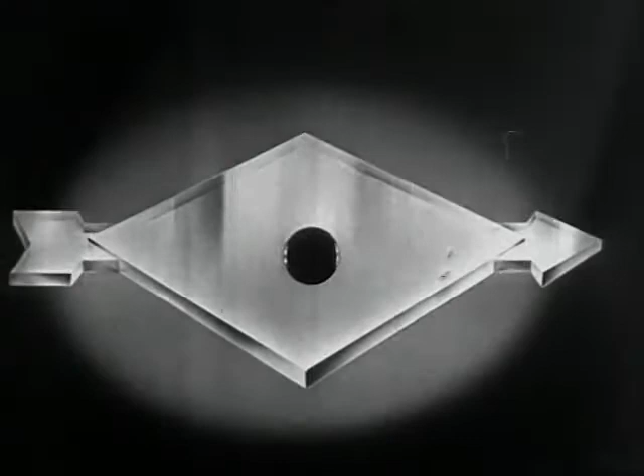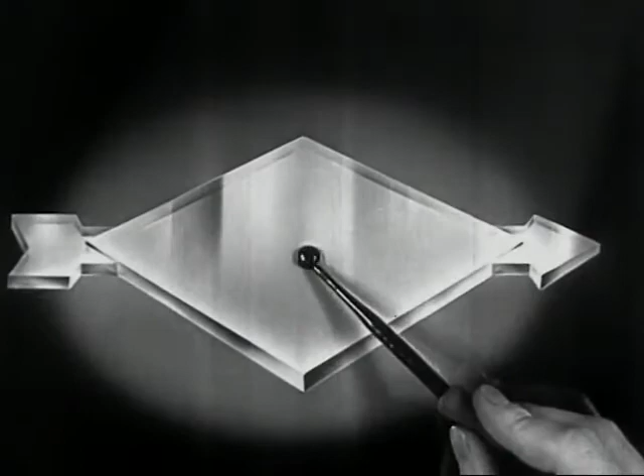The flash of power, the gleam of oil. In the sky, the power of oil conquering the heights. On the sea, the might of petroleum pulsing in great engines of the liners that traverse the deep. On land, oil feeds the fiery furnace or drives the diesel engines along far-flung rails of steel. And on the open road, well, you know what makes your auto run.

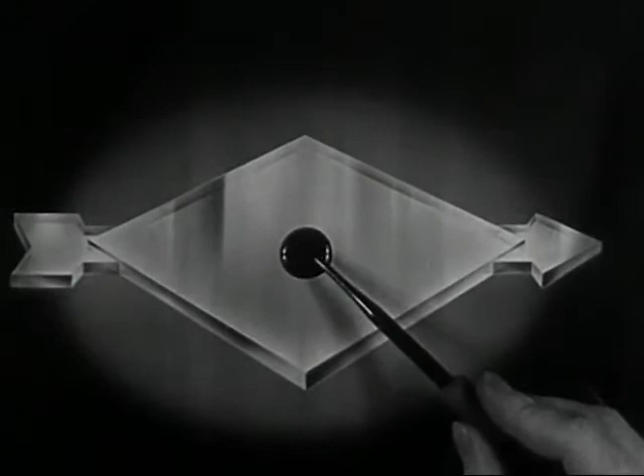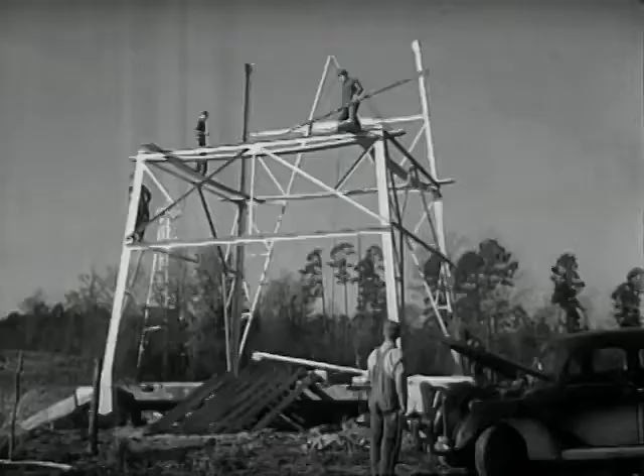For millions of years, this source of power slept peacefully in the dark recesses of the earth until modern magic loosed the liquid energy from its subterranean prison. Great areas became forests of towering derricks. And here's how the petroleum forest grows.

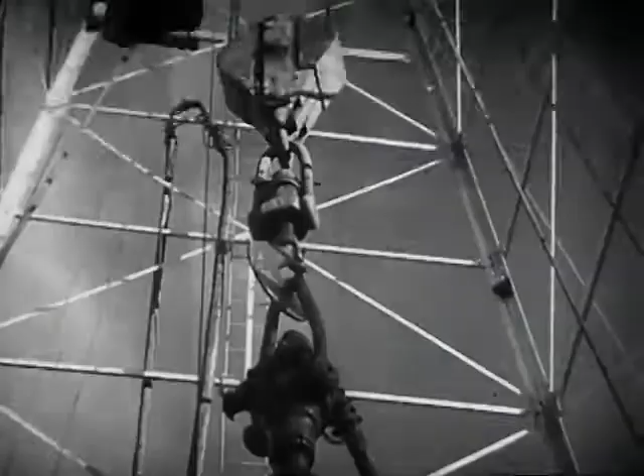A cellar is dug, and a rotary table to turn the drilling stem and the bit is set in place. Round and round the rotary goes, drilling deep down to oil. A steam engine drives the drilling mechanism. They're inserting a length of pipe, lengthening out the stem for deeper drilling. A new joint is waiting.

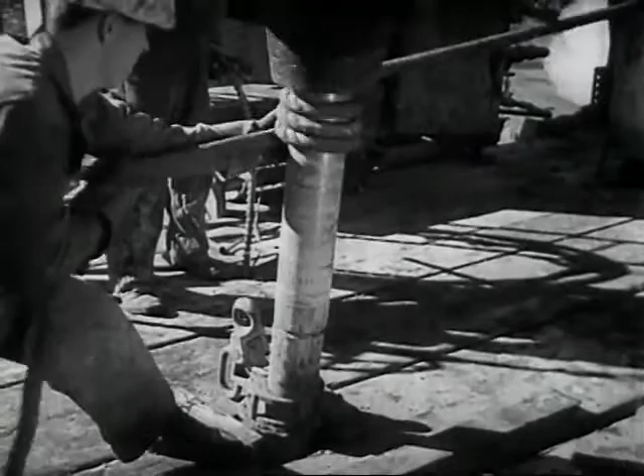Oil field workers are called drillers, roughnecks, roustabouts, rope chokers. The oil field treats our ears to odd and colorful names. Now the drilling stem has been lengthened, then round and round once more.

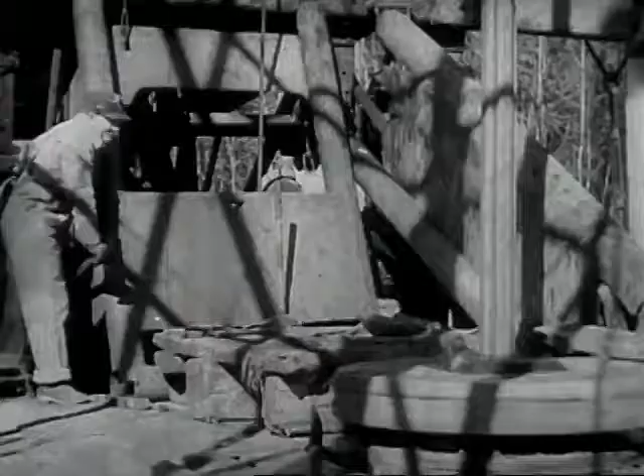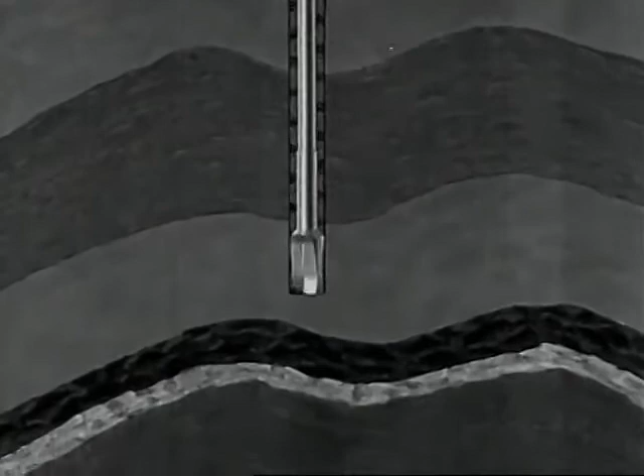Down through layers of sandstone, shale, limestone, down to astonishing depths. This well 5,000 feet. Some 10,000, 2 miles into the earth. And then, after weeks of drilling, fighting against natural obstacles, the drill at last reaches the oil sand, porous rock, which holds the oil much as a sponge holds water.

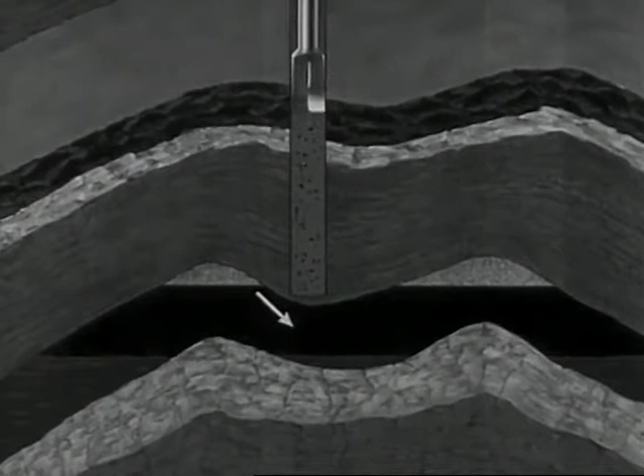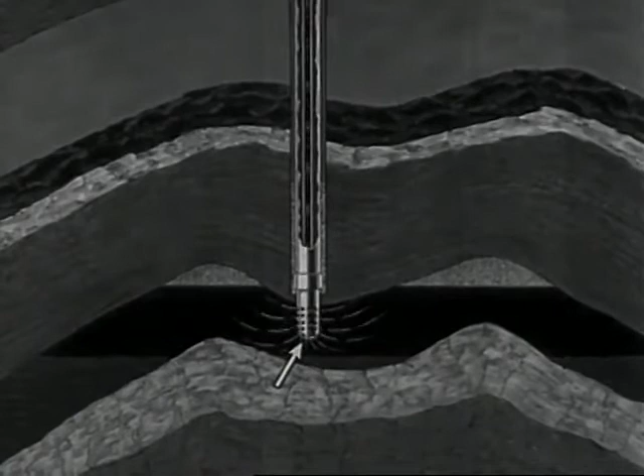Next, the casing is lowered to the bottom of the hole and cemented in position. Then drilled through the oil sand, and a screen is installed at the base of the casing. The screen extends down into the oil sand. The oil flows through the screen, up through the small pipe tubing to the surface.

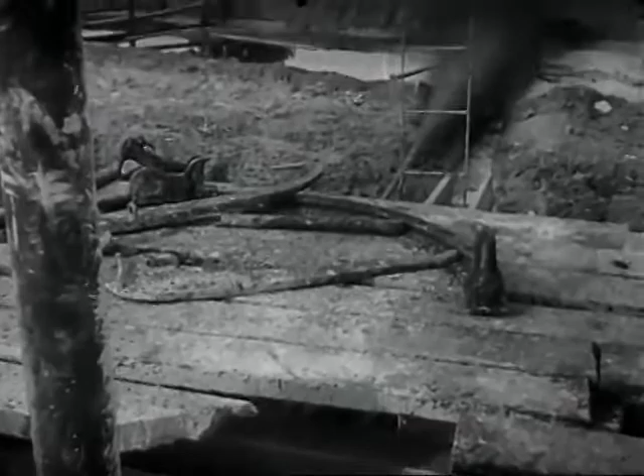So they've struck oil, and now the well must be cleaned of the mixture of drill mud and oil. Some wells flow of their own pressure. Others must be pumped, need power.

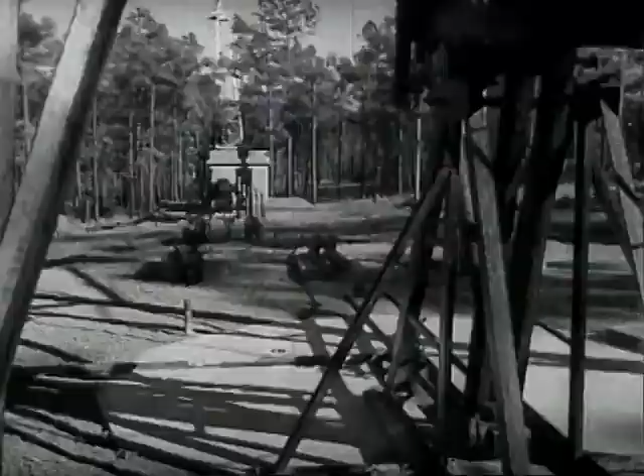The power is transmitted to groups of wells, the ever-swaying rocker arm, the rhythm of pumping, the unceasing heartbeat of the oil fields. A 24-well hookup is the height of oil field power, pumping black magic from 24 drillings in the earth, all at the same time.

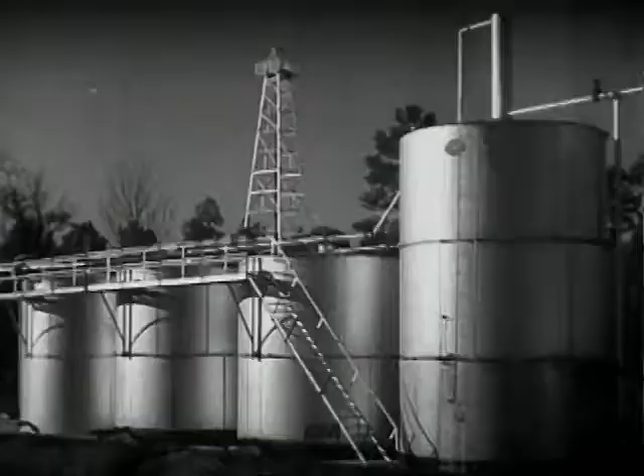Out of the ground, the oil is cleaned of natural gas or water, which is combined with it. Next, the petroleum starts on its way through a great network of pipelines. There are powerful pumping stations every 40 or 50 miles to keep it moving along the lines. The lines of pipe, alive with racing oil, run through forests and over plains to these silver discs.

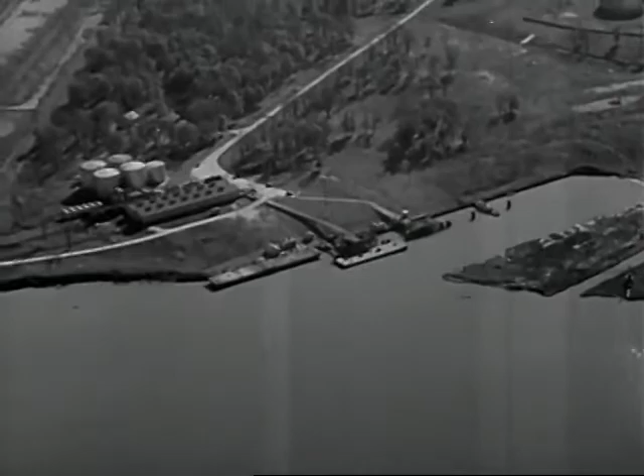They're storage tanks where the oil rests briefly before it rides the waves in giant tankers. And they're masterpieces of shipbuilding, those tankers of steel. The largest navigate the sea at 15 knots and carry 5.5 million gallons of oil. The voyage of oil to the refineries.

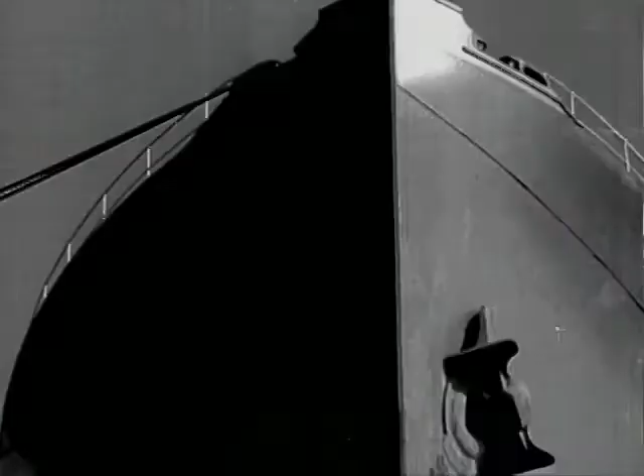The refinery with its modern structures, technological towers, minarets of science, docks, office buildings, pageant of industry. Day after day, there is an endless flow of oil as the tankers discharge their liquid cargo.

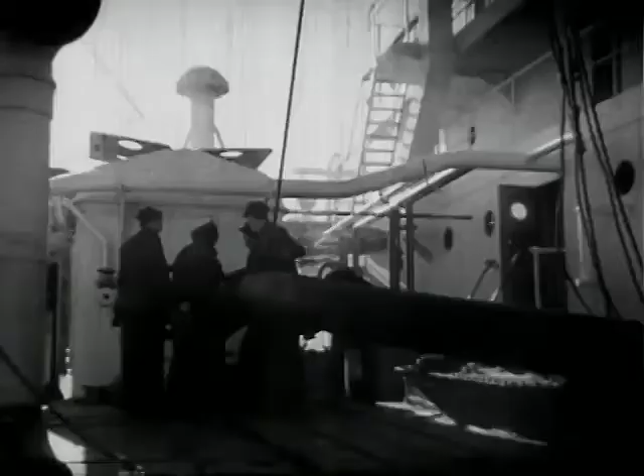Unloading oil is a vast operation of piping through huge hoses. Discharge pipes on the vessel and receiving lines on the dock are connected, and a cargo of 5 million gallons is discharged in less than 24 hours.

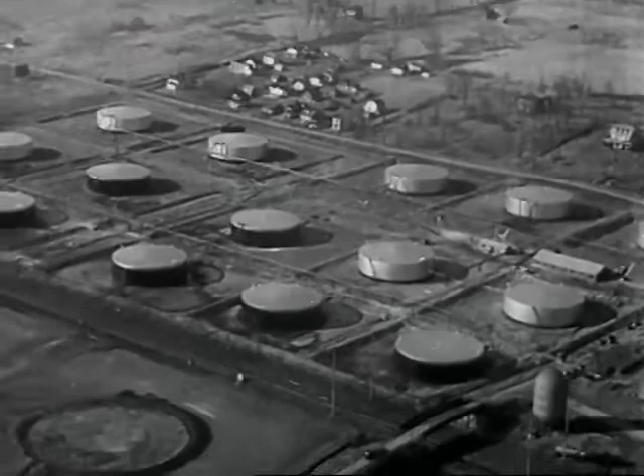No two cargoes of crude oil are alike, so each boatload must be stored in different tanks, and each batch must be processed individually, with laboratory tests to indicate the precise treatment for each.

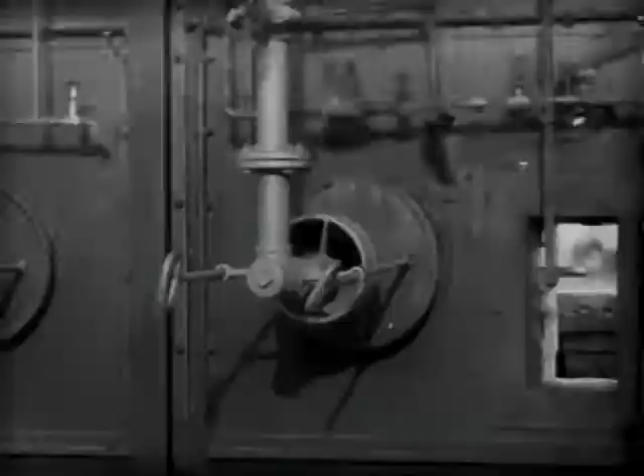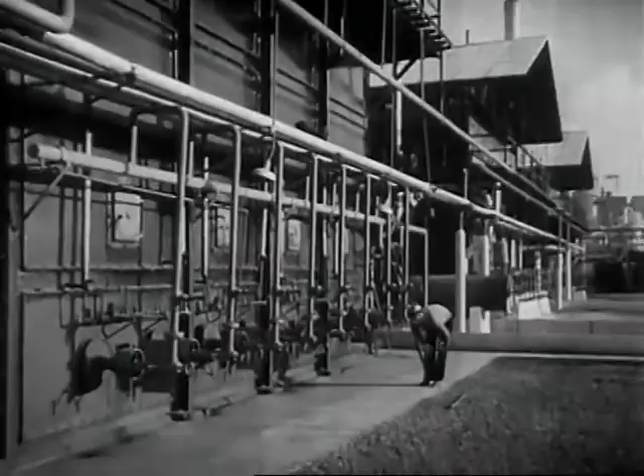That is embodied science. Those masses of strangely wrought steel, forests of stacks, glowering and hissing boilers, leaping and winking fireboxes. Intense heat, the flames roar in the furnace, yet the oil flows so fast the heat does not scorch it. And scientists wrest from the crude petroleum its tremendous power in the form of gasoline and other fuel oils.

And that's done in these towers called fractionating towers. They divide crude oil into the lighter and heavier parts. Those of different boiling points liquefy at different levels in the towers.

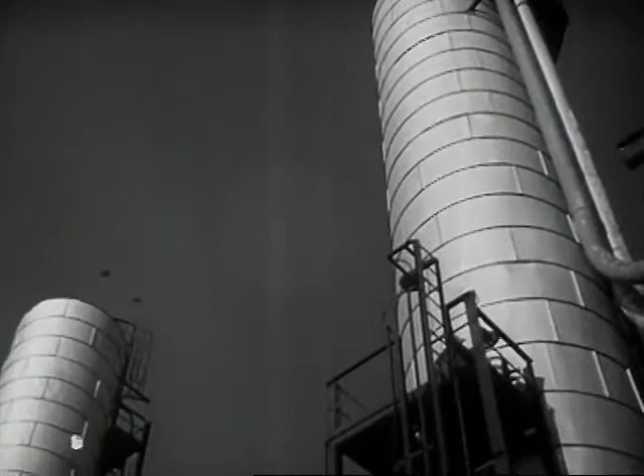Some lighter than gasoline liquefy at the top. Heavier parts liquefy further down. At the bottom are the heavy fuel oils, or the raw materials from which lubricating oils are made.

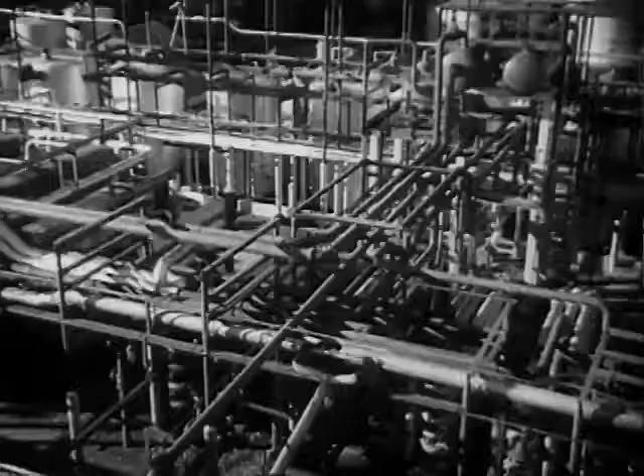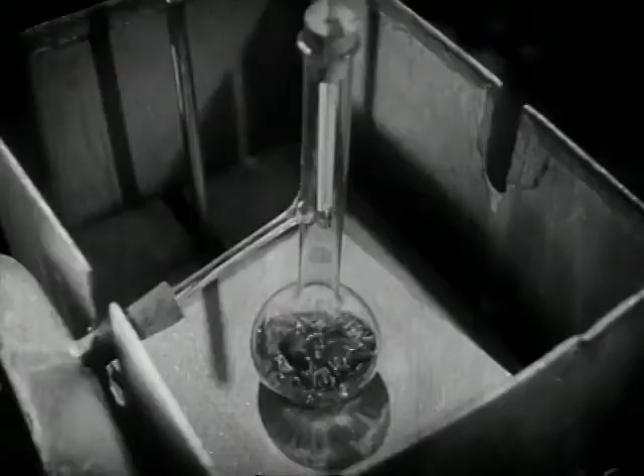When increasing use of motor cars pyramided the demand for gasoline to extraordinary heights, scientists were called upon to devise new methods. How could a greater proportion of gasoline be extracted from the crude oil than that obtained from the fractionating tower alone? To meet this challenge, the scientists turned to products other than gasoline which are drawn from the crude, studied their molecules, and found a way to change them, to turn them into gasoline.

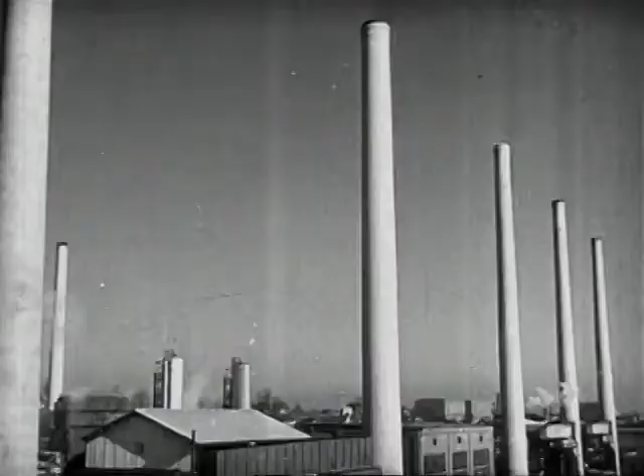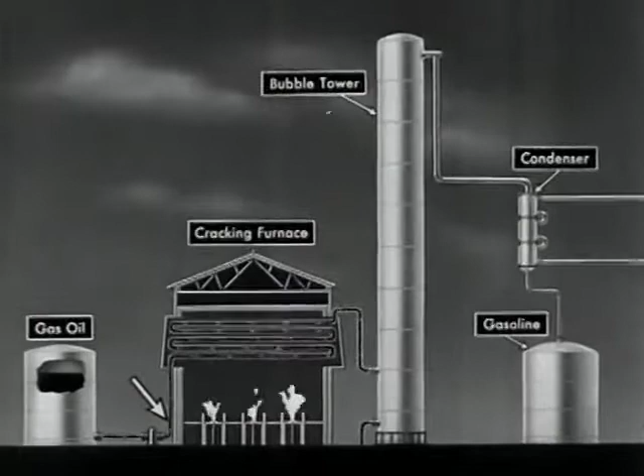The result was cracking. Let's look at a diagram of a cracking plant. Here we see how one part of petroleum that is not gasoline is converted into gasoline. Called gas oil, it is pumped through a pipe into a cracking furnace, heated to over 900 degrees under tremendous pressure. And the individual particles, molecules, are broken into smaller molecules, just as coal is broken under a hammer.

If we could see one of those molecules, it would look something like this. The hotter the molecule gets, the faster it wiggles, until finally it wiggles so fast it flies apart. The pieces shoot around at great speeds. They eventually find partners and form new and smaller molecules that look something like this.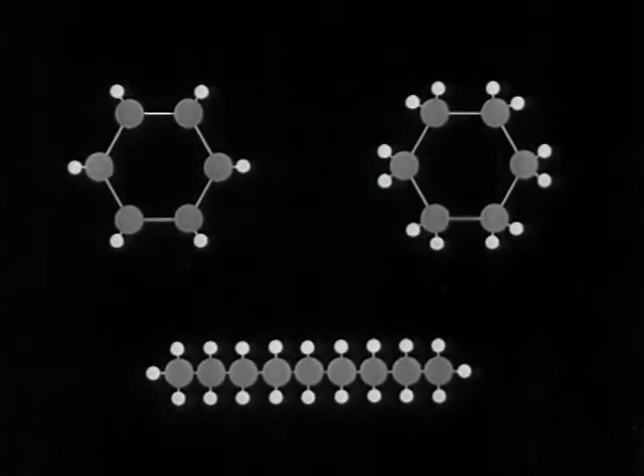These smaller molecules are now no longer gas oil, but are gasoline of high-powered, knockless quality. Some of the gas oil molecules do not fly apart and must be separated from the gasoline.

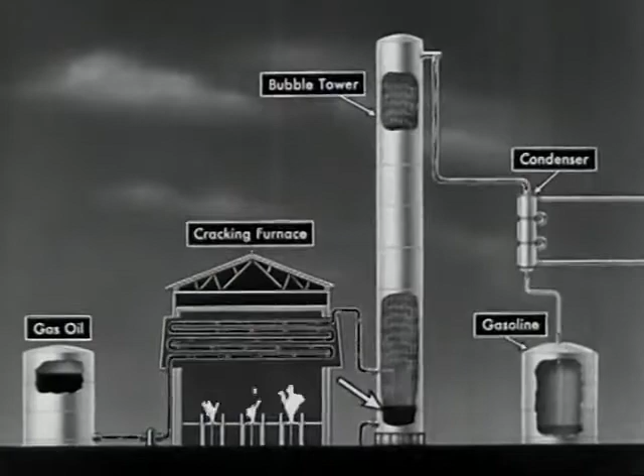This is done in the bubble tower. Here the big molecules, which are not gasoline, are held back and come out at the bottom as a liquid. The gasoline goes up the tower as a vapor, comes out at the top, and is condensed into liquid gasoline. Gasoline that gives more power to you.

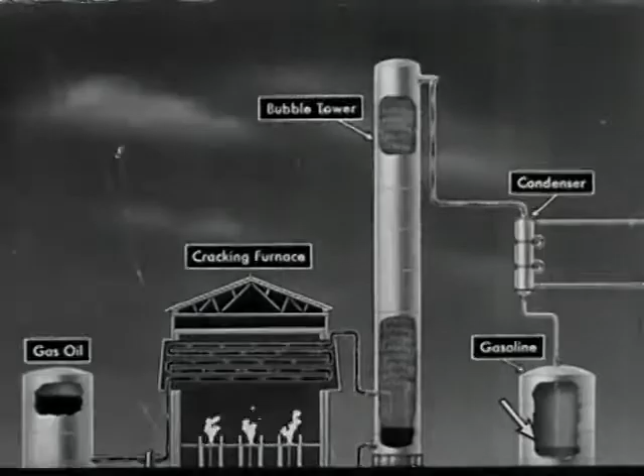Experiment is the key to it all, and this is the experimental laboratory. In the making of powerful motor fuel, the control of temperatures is of extreme importance, and it is measured to an accuracy of 1/100th part of 1 degree.

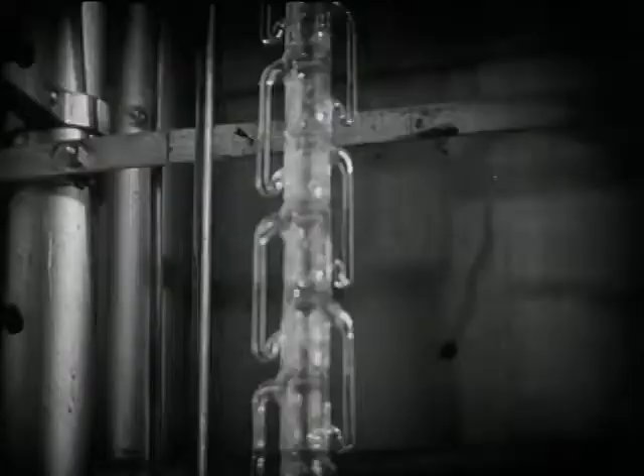Gasoline is broken down into over 200 parts in that elongated tallness of glass, and each individual part is studied. The laboratory with its strange gleaming of new and unpredictable things. Here are created modern miracles with the chemistry of oil.

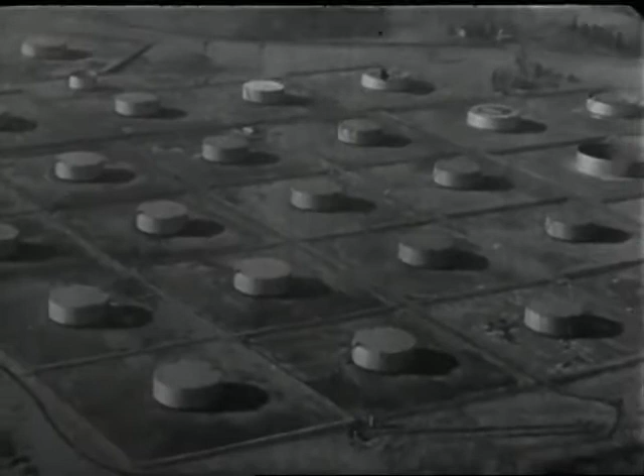Tank farm, to which the motor fuel goes from the refinery, and then out to the nation, by railroad tank car and by motor barge. Pipelines run their web-like nets under rivers, over mountains, carrying gasoline that goes into millions of gasoline tanks to generate billions of horsepower for the nation.

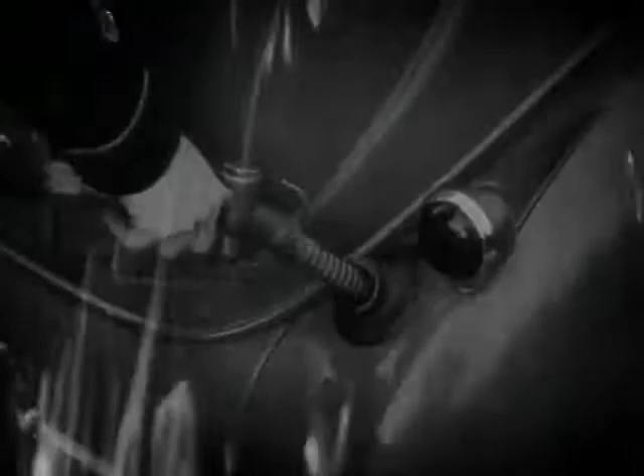Oil means horsepower in a horsepower-using world. Briefly, in 4 words, more power to you.